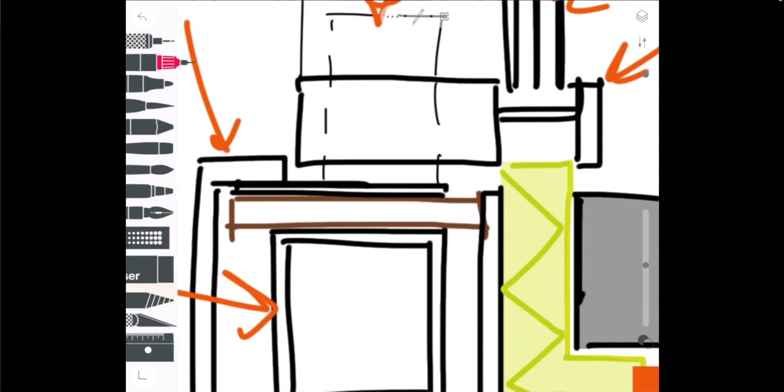And I've just wrapped the gypsum board back towards the frame here, so there would be a bead of caulking put right there. And so I've drawn some brick on the outside here, and I decided to do a sloped concrete sill in this case. Obviously it's not what you have to do. You could just do brick, just keep carrying this brick up like this.

Let me just do it like this, kind of messily. You could just keep bringing brick up and then just put flashing over that like that. I think that's kind of ugly. You could break off a brick and do a slope brick like that. That's very popular as well. I just decided to go with the concrete sill.

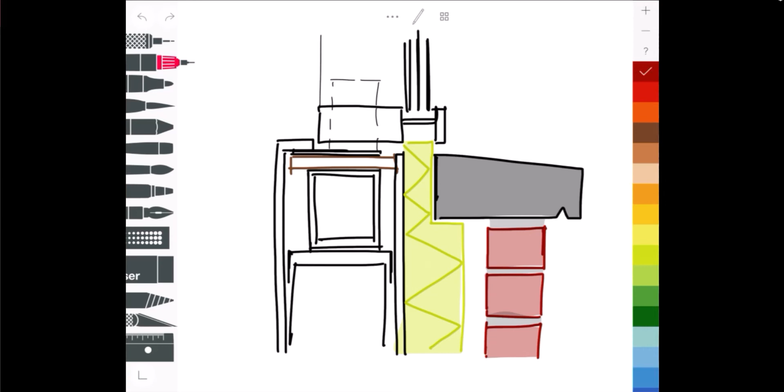What is important here, whatever it is you end up doing, whether it be flashing or a slope brick or a concrete sill, is to have a drip edge there. And get that out a good 15 to 20 millimeters if possible. Obviously always slope away from the window. That's very, very important. I haven't drawn in the flashing here, so the flashing actually tucks up into the frame like so. So in this case, I would just stop the flashing.

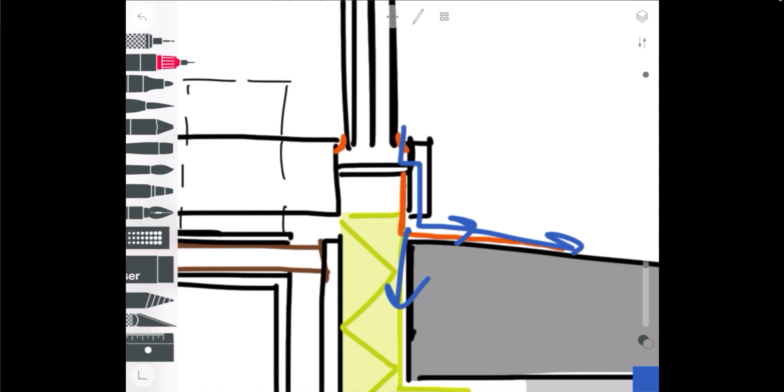The whole point of having a concrete or stone sill would be so you could see it, so you don't have to carry the flashing out too far. But certainly, the way these windows are designed, there's a seal here and here, and if this one ever fails, these window systems are designed to drain, so water will actually drain out like that. So you just want to make sure you're getting it out onto the sloped surface and not feeding it down into the wall cavity. That's really the point there.

I guess it would really depend on the window manufacturer and the situation, but you could put in a rigid insulation foam block in there. More often than not, though, it's a piece of aluminum, an anti-rotation bar is what they call it. Because there's no glass in there, it's a piece of aluminum that gets shoved in there so the frame doesn't twist.

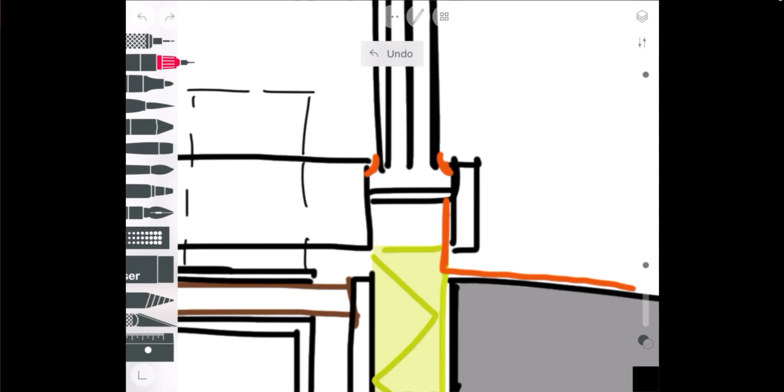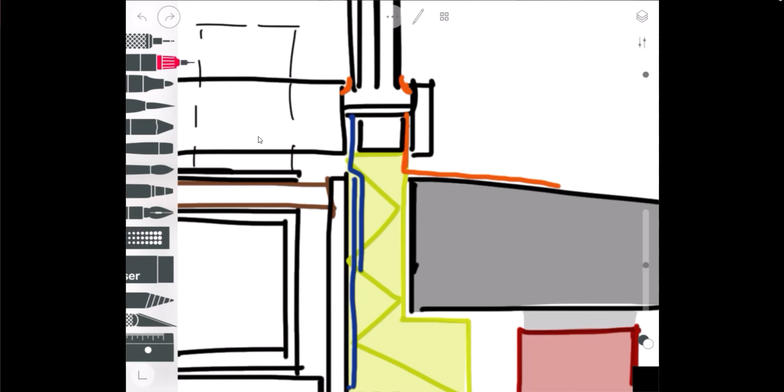But what I have forgotten here is my air vapor moisture barrier. So it's pretty simple. Here's the one on our wall right here. And then there's another one that just gets tucked into the window pocket right there. And then that anti-rotation bar gets put in there, and it clamps those things in nicely. Other than that, that's really it.

You're going to lose some insulation, obviously, whatever you do at your sill right here. You're probably going to lose it if you do some type of stone or concrete or angled brick right there. But remember that if you have triple glazing, the thickness of that insulation isn't any worse than the window system itself.

So it's okay to have smaller amounts in locations like that. It just happens. The only thing that's glaring out at me here is, maybe this thing is going to get back heavy right here. So, if there was a concern with that, it'd be a pretty easy thing to fix. I mean, you could just put in a piece of like little galvanized metal bracket like that or something in there would work.

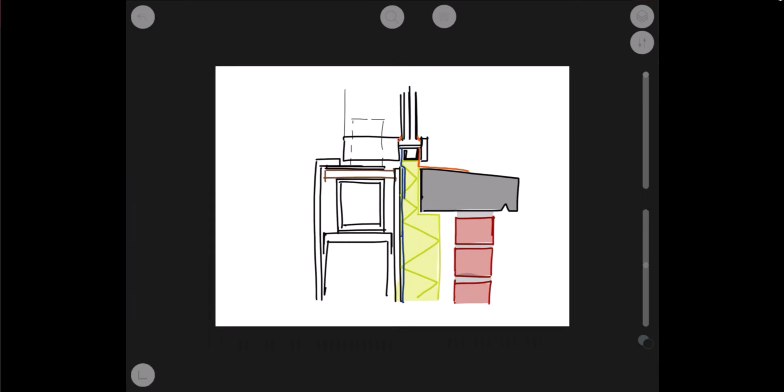You just want to make sure that water could drain through here, so you probably want to have that thing perforated, metal angle just to help support the back of that sill like that. But I won't show that for now. But that's really all there is to it. Again, you would have your vent holes at the top here.

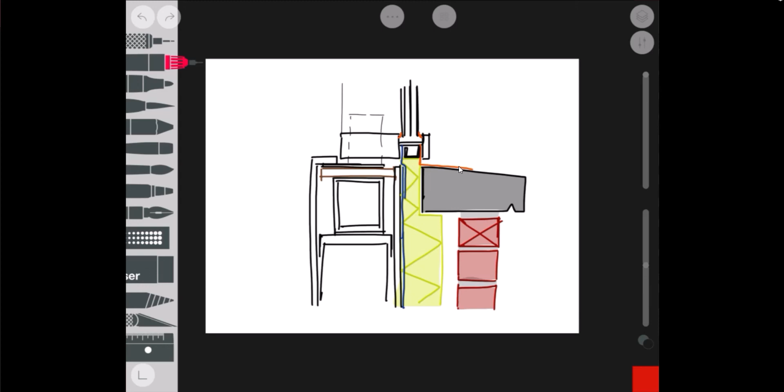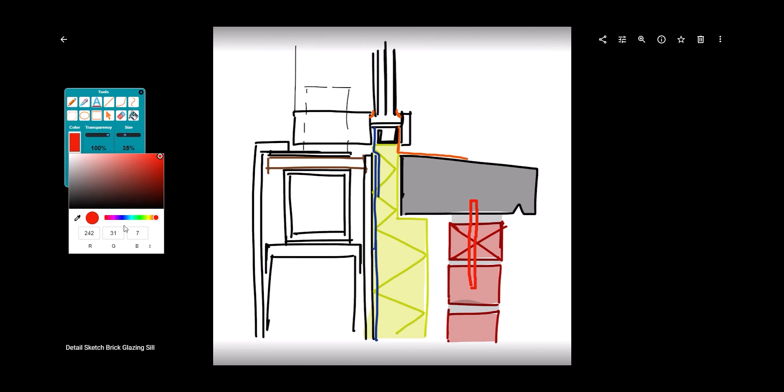Something else I forgot to mention on this detail here is, if there was ever concern of this breaking off and falling, or getting bumped or whatever, what can be done there is you can fill the holes in the brick with mortar and put like a steel rod in there, basically. Embed it into the mortar in there, and then that would go into slots in the concrete and epoxied in there. That'll hold that there really well.

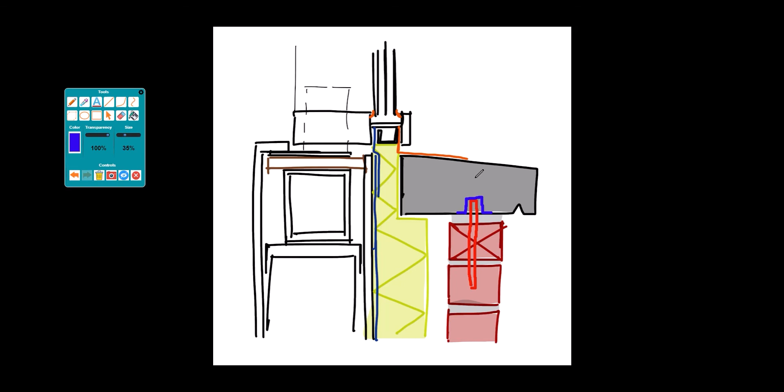So just something else that probably should be considered when you're doing a heavier stone sill or concrete sill for a windowsill, or actually a parapet cap as well. You often see the concrete parapet caps at the top of walls, so they're usually pinned in like that. So anyways, it might be a little bit overkill on a windowsill, I suppose, depending on the situation, but certainly something to consider.